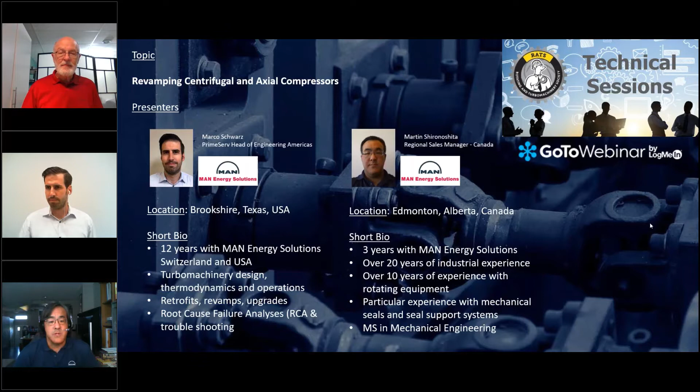As Ralph said, my name is Martin, don't worry about the last name. I am located in Edmonton, Alberta, and we are MAN Energy Solutions, formerly known as MAN Diesel and Turbo, formerly known as MAN Turbo, which is a name that I hear quite a lot from my contacts here.

So very quickly, the history and timeline that we have: MAN really goes back a lot in history, all the way back to 1758, which is when we formally consider our founding date. Then as time went through and mergers happened, we incorporated legacy brand names such as Borsig and GHH, which then became GHH Borsig.

On the other side, you see the Sulzer bracket, which was Escher Wyss, which then joined Sulzer. Sulzer joined with Brown Boveri, became BST. Then they separated part of that into the ABB stream, and Sulzer Turbo left with some of the turbines and compressors. Sulzer Turbo was basically joined with MAN around the early 2000s, and that became MAN Turbo at that time. Then through time it just changed to MAN Diesel and Turbo to incorporate the diesel engines division that we have.

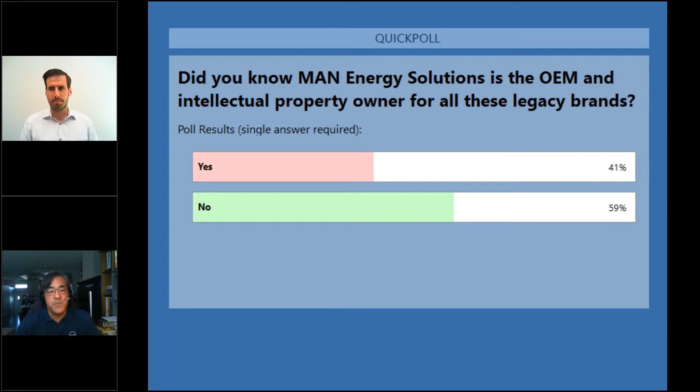It's good to know. So with that said, keep in mind again these brand names. Marco, if you could go to the next slide.

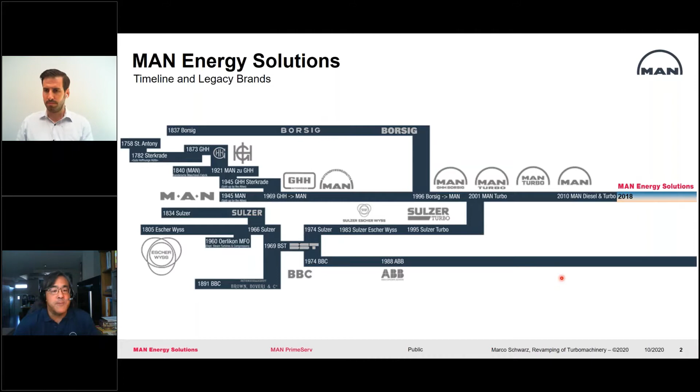Just so you can see between our turbomachinery, but also our marine engine division, which is the other big part of our organization. Now we have a fairly large global footprint and quite a bit of presence in Europe, Middle East, Asia. Here in the Americas, we are getting quite a bit of traction now with more localized support, as in the person of Marco, as a matter of fact. So just a quick snapshot of how wide our network is and our capabilities to properly support your turbomachinery needs.

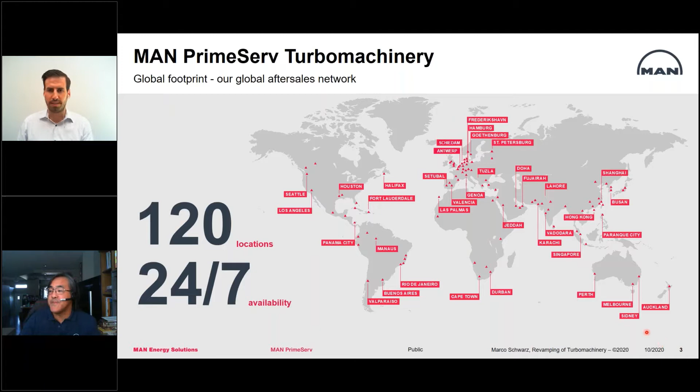I'd like to start with a simple question: why revamp turbomachinery? If your mics were open for this webinar, I would take your responses, but that's not the case for this setup. So just spend 3, 4, 5 seconds thinking about that question - why is it necessary to revamp turbomachinery?

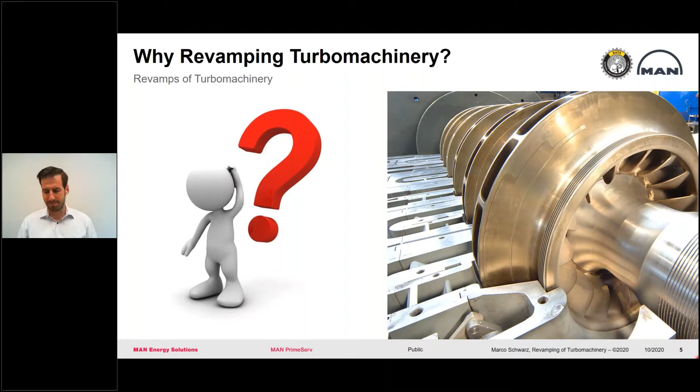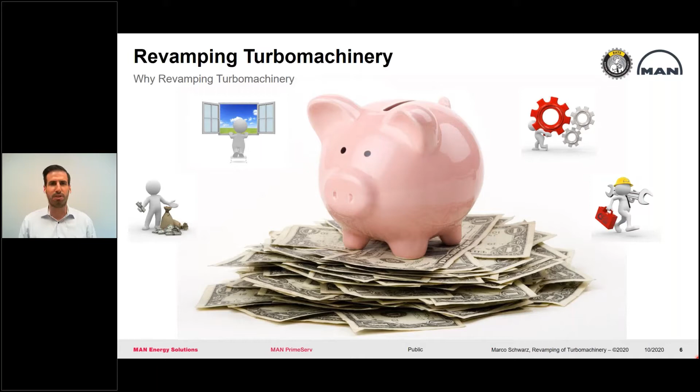This is the answer: it's about money. Well, that's the main answer. However, there are several other reasons why turbomachinery can and should be revamped, and I'll mention those in the following couple of slides.

First, I'd like to give a short introduction about background and reasons for revamping, as mentioned. Then we have the technical aspects about axial compressors and centrifugal compressors - what and how equipment can be revamped. Then we'll talk about MAN OMNICARE, which is our term for modification of equipment supplied by suppliers that are no longer in the market. And last but not least, we'll have time for discussion and your questions.

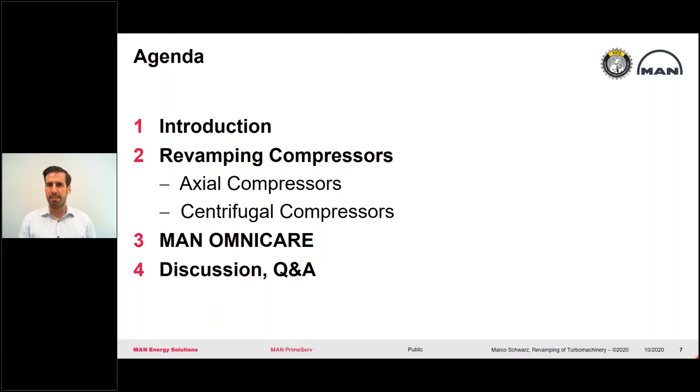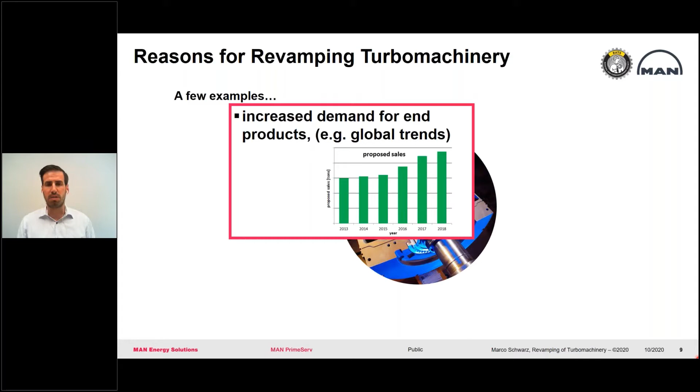Having said that, I'm going to start with the introduction about reasons for revamping turbomachinery. One of the main reasons is increased demand for the end product that any manufacturer provides - this can be refined products, plastics, air separation, whatever business we're talking about. There's often just an increased demand for the end product, which results in an increased demand and increased performance required from the turbomachinery equipment in the corresponding plant.

Another reason is efficiency improvement and emissions reduction, a topic that became more important over the last couple of years and will become even more important in the future.

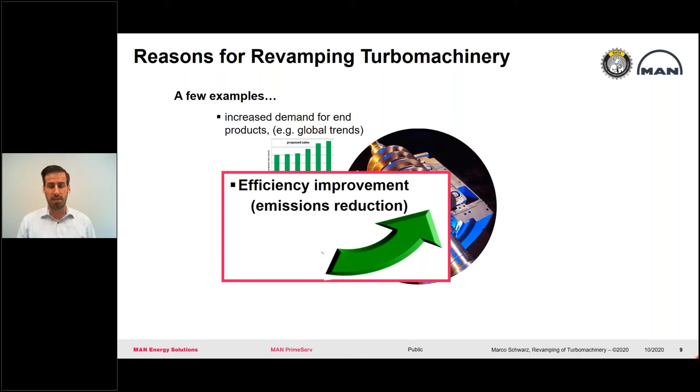Furthermore, we handle a lot of natural gases, and natural gases tend to change over the years. The composition of gases in a gas field somewhere around the globe doesn't stay the same throughout the whole existence of that gas field. So the gases change, and if the gas composition changes significantly, the turbomachinery equipment may not be capable of handling it anymore and needs to be adapted accordingly.

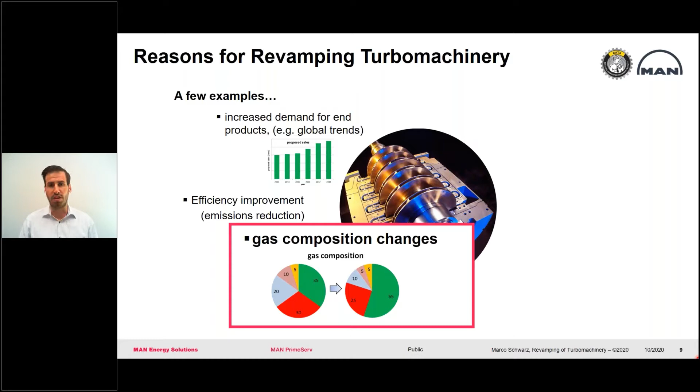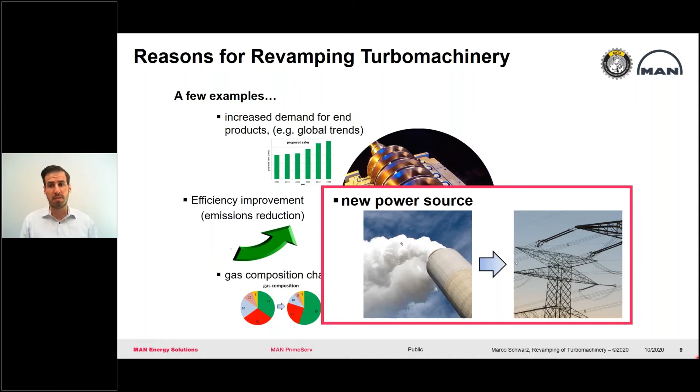New power sources are another reason. There are times when it makes sense to switch from a steam turbine to, for example, an electrical motor to drive the compressing equipment, or the other direction, or from gas turbines to electrical motors, or vice versa.

Adapted process demands - the overall process in a plant changes due to modernizations and adaptations, which then results in adaptations to the process conditions of the turbomachinery equipment.

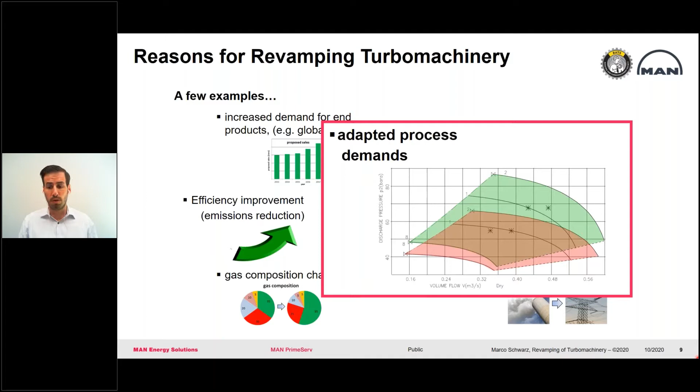And last but not least, gas field pressure decreases. As mentioned, much of the compressing equipment is installed in the oil and gas industry, and pressures in the fields drop over the years of production. That means the compressing equipment needs to be adapted accordingly - a higher pressure ratio is required, which can result in modification of the equipment as well.

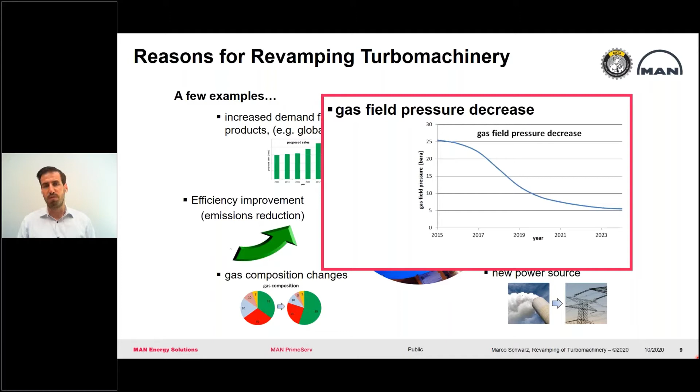What are the general benefits of revamping turbomachinery? First, as mentioned, one of the biggest drivers is usually financial savings and earnings - reliability, efficiency, and increased production eventually end up in dollar values. Besides that, the Green Deal, reduction of emissions, and energy savings are becoming more and more important throughout any industry where turbomachinery is installed.

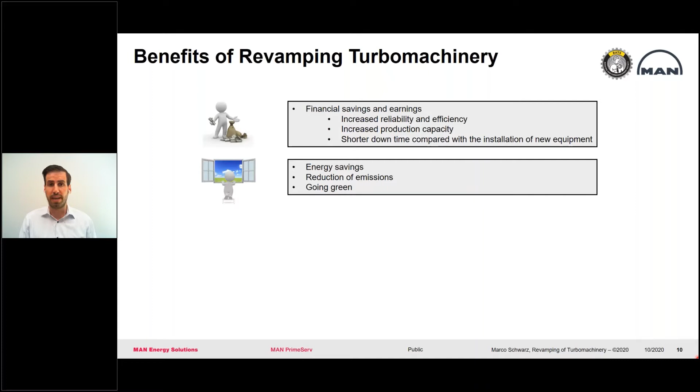Furthermore, there are technical reasons - optimization of production, safety, or adapting equipment to state-of-the-art design, or just minor changes to the equipment with reuse of the main existing components. We'll dive into that a little more later. Last but not least, there's the human factor, which shall not be neglected.

Operating personnel sometimes is used to equipment for decades. Consider the fact turbomachinery might operate for 50, 60, 70, or even 80 years in the same place, and certain procedures are established. It's not easy for on-site staff to adapt to completely new equipment with different behavior, which can result in unforeseen shutdowns and difficulties when equipment is completely replaced. It might be worth instead to replace parts of it and modify the existing equipment accordingly.

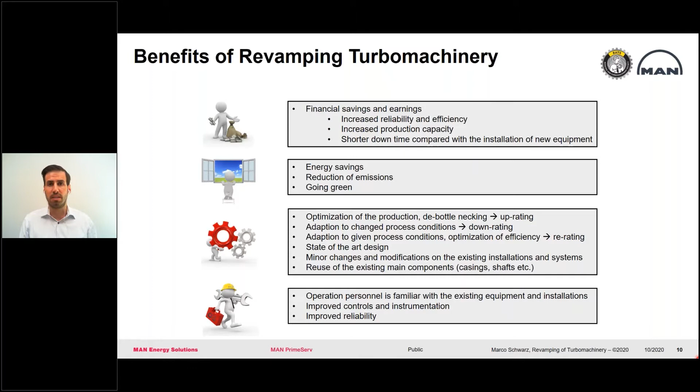Installation costs are way lower when the main components of the existing turbomachinery can be retained. Let's say the outer casing remains in place as is, so we have a very short shutdown: open the casing, remove the old parts, install the new parts, close it back again, ramp up, and you're back in operation. Instead, replacing the whole casing usually results in adaptation of the pipework, foundation needs to be reviewed, and certain things always come up during these replacements. So standstill and shutdown times are much longer, resulting in significantly higher costs.

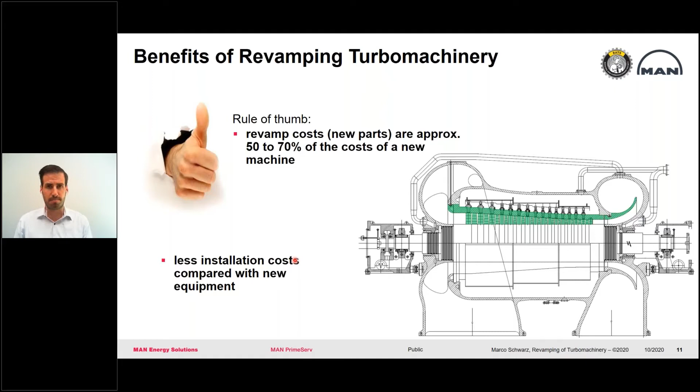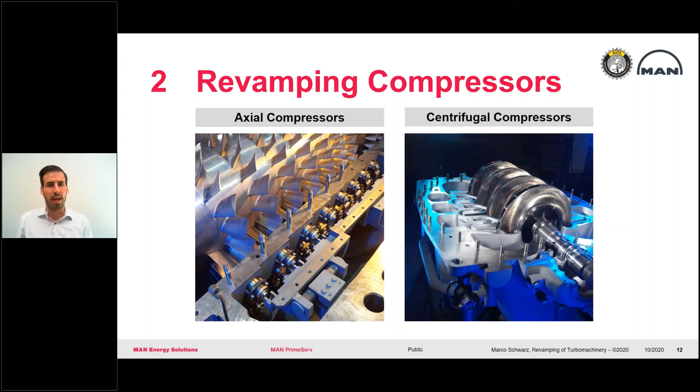Now we're going to dive into the technical part of that presentation. I'm going to start with the modification of axial compressors.

You saw a pretty similar sketch drawing of an axial compressor just a few slides earlier. This is the inlet nozzle, here the flange, and we're feeding through the inlet volute into a certain number of axial compressor stages, which usually consist of a rotating blade and a stationary vane. The medium, mainly air, is compressed, fed through the diffuser into the discharge volute, and then fed to the downstream pipework and the process. What we're going to look at specifically is the internal part of the axial compressor, call it the thermodynamic or aerodynamic part of the equipment.

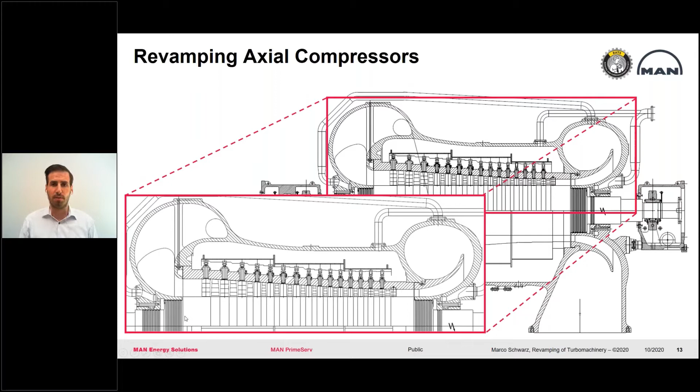Let's talk about modification of that existing compressor. The easiest thing to do is to change the rotating speed, lower it or increase it. The question is, what is the impact on the performance envelope when changing the speed?

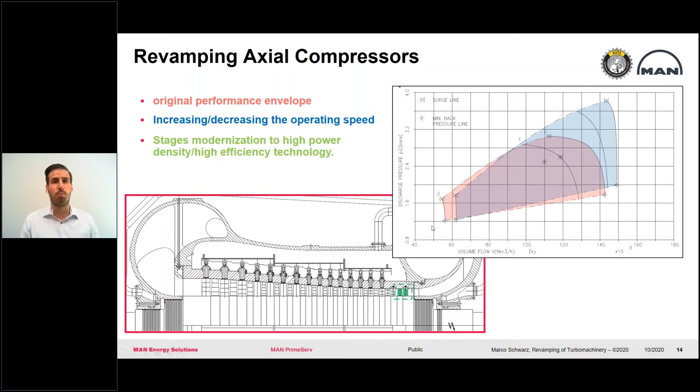Besides that, another common revamp option for axial compressors is to adapt the stages. That can be replacement of the stages by a different blade design or type, or in order to keep costs low, additional stages can be installed or just removed. So the question is, what happens if we add an additional stage, consisting of a rotating blade and a stationary vane, on that compressor? How does the performance envelope shift?

In this case, the envelope shifts upwards. Adding stages means we increase the pressure ratio, that means we lift the discharge pressure, that's the only thing we do. If we remove stages, of course, we lower the pressure ratio. So we can say we adapt the performance envelope, we move it vertically, but there's no horizontal movement to lower or higher flows.

A bigger revamp modification that can be done is to exchange the flow channel and the blading. Of course, that ends up in higher costs. However, it offers way more flexibility. As an example, it's possible to shift the map to higher flows or to lower flows if the unit is oversized, less flow is required, and we want to avoid recycling throughout continuous operation. Last but not least, of course, the combination of all of those options gives us the biggest flexibility, and we can gain quite a bit of an envelope and a range of modifications that can be applied to that existing equipment.

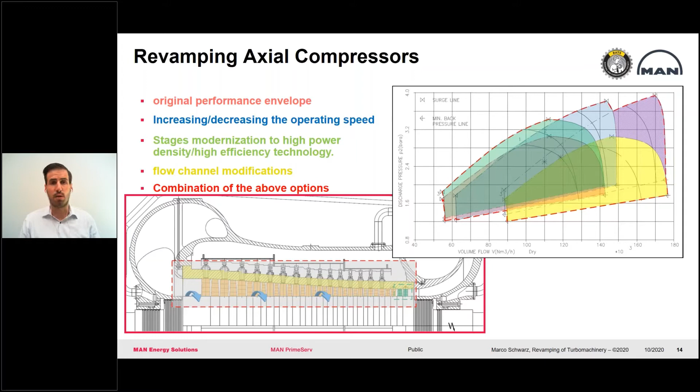Another revamp option that comes up pretty frequently is the replacement of hollow shaft design rotors by solid shaft design rotors. Back in the days, we're talking about the 60s, 70s, sometimes the 80s, many of the compressor shafts were made of a hollow shaft design. Reason for that was basically it was lighter, and material costs were much higher. Nowadays, I'm not aware of one single manufacturer for major equipment that still builds hollow shaft rotors like we did in the old days, and there are some reasons for that.

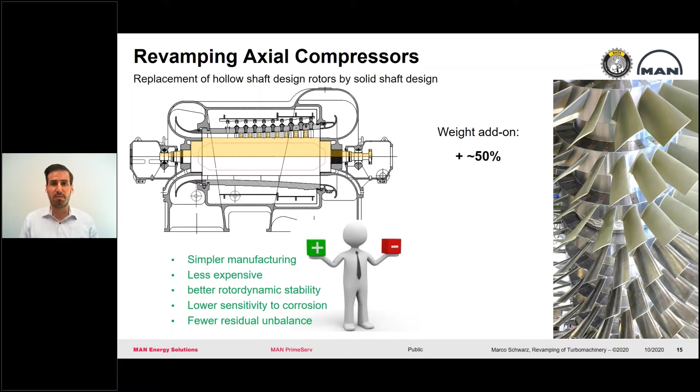The downside, of course, is we're going to add weight. We can consider about 50% of weight increase when talking about an axial compressor shaft. However, the pros are we have simpler manufacturing, and this is the main cost factor that makes it less expensive. We have much better rotor dynamic stability because the equipment is heavier, it runs more stable, and we have lower sensitivity to corrosion. That might sound special, however, if you consider the hollow shaft design, they're either welded or screwed, and there's always space and weak points where corrosion can start and be initiated. With the solid shaft design, these weak spots are basically gone and not present anymore.

At the downside, as mentioned, we build heavier. That means the existing equipment needs to be checked if they can handle that additional 50% of weight. Is there any impact? Do we have to exchange the bearings? Is there even bearing housing that needs to be exchanged? And of course, the transportation of the equipment to site. However, considering that the equipment might be running for 30-40 years, transportation is usually just a very small factor.

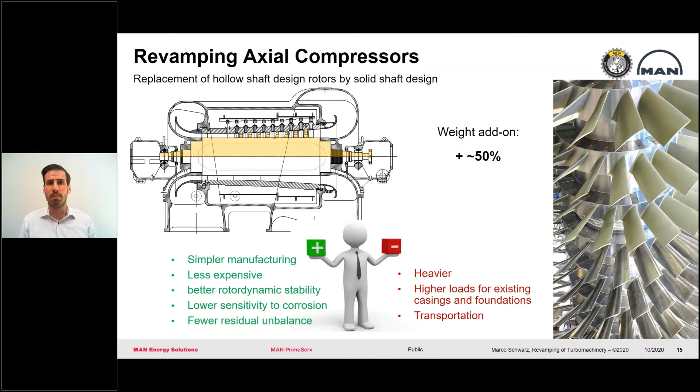Let me give you an example for a revamp of an axial compressor that MAN performed a couple of years back. The original equipment was installed in the 1990s. It's a refinery in the Middle East, and we're talking about an A45-11 compressor. A45-11 was the former Sulzer turbo code and actually means axial for axial compressor. 45 is the diameter of the shaft in centimeters, and 11 is the number of stages.

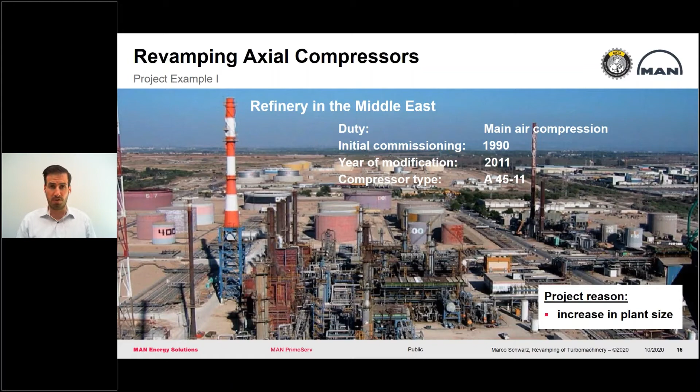The reason for that revamp was one of the most common aspects: increasing plant size, increasing production. Looking at the setup, we were talking about that A45-11 compressor, which was coupled with a flexible disc coupling and driven by a steam turbine. We were talking about a pressure ratio of about 3.5, from atmospheric to 3.5 bars absolute discharge pressure, about 90,000 norm cubic meter air, and we have a speed controller to handle and control that compressor, which is pretty normal for steam turbine driven equipment.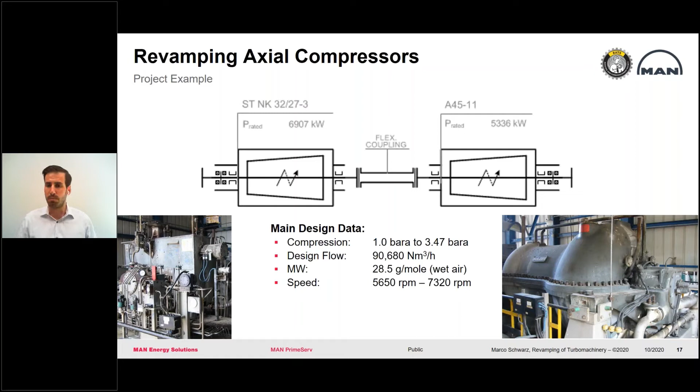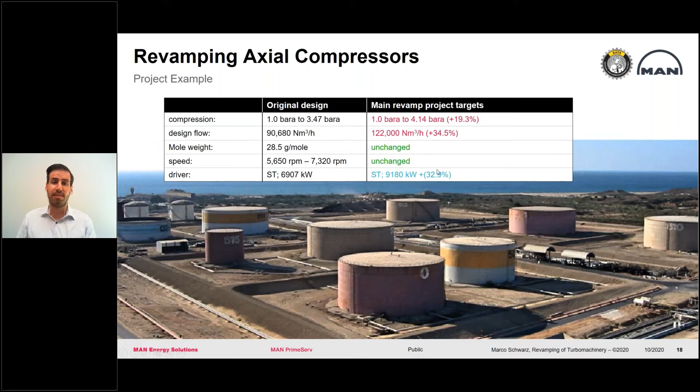Looking into the figures of that plant increase, that resulted first of all in an increased pressure ratio for the compressor. The plan was to increase the pressure ratio by 20% to go up to 4.2 bars absolute discharge pressure. The main factor was the flow increase - we're talking about a flow increase of 34.5%, which is a major increase for turbomachinery equipment. Eventually, that results in higher power consumption, and the turbine needs to be looked at as well.

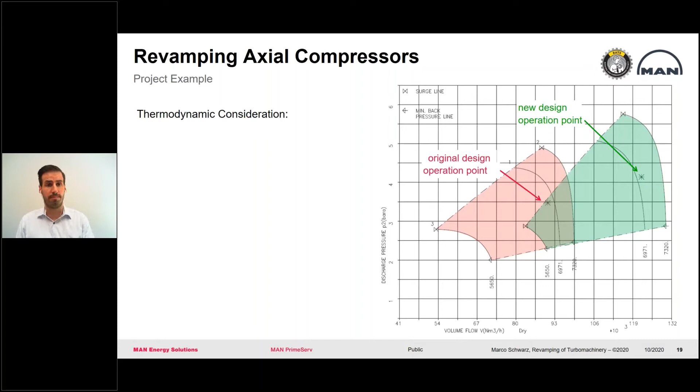Looking at the thermodynamics, this is the map, the original map as we saw before, with the original design operation point where the unit was running. The new design point had a higher pressure ratio and a higher flow up here. This was the new map after the revamp. How could this be done? It's a major change, and what was necessary to be exchanged on that existing compressor to meet that target? Here we see a cross-section of the original compressor and the revamped design.

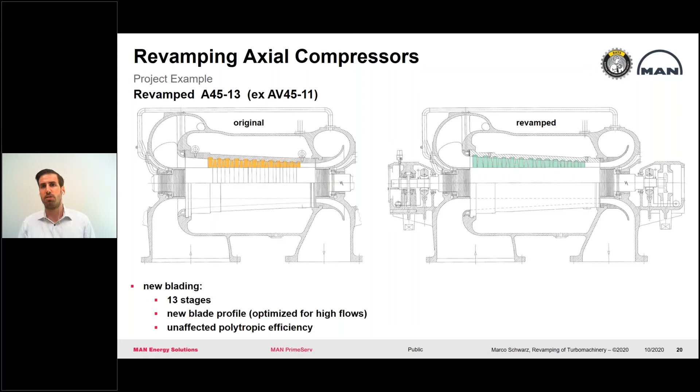In general, the flow channel needed to be increased. It was not possible to push this additional 35% through exactly the same flow channel - that would have resulted in too high speeds and gas velocities. Therefore, it was necessary to open the mouth of the flow channel and replace it with a larger design.

Last but not least, we needed about 32% additional power to do that compression, so the turbine had to be adapted as well. We had to replace the second stage, which was the throttling stage of that turbine, to be able to supply that power. In general, all the rest could be retained.

It was not necessary to touch the outer casing. The shaft could be reused, seals, bearings, coupling, unchanged oil system, and retained anti-surge and safety valves, which were sized from the initial installation for quite large sizes, which is usually not the standard, but can be the case every now and then. Considering the amount of modifications done for getting that much more out of that unit, it's quite impressive.

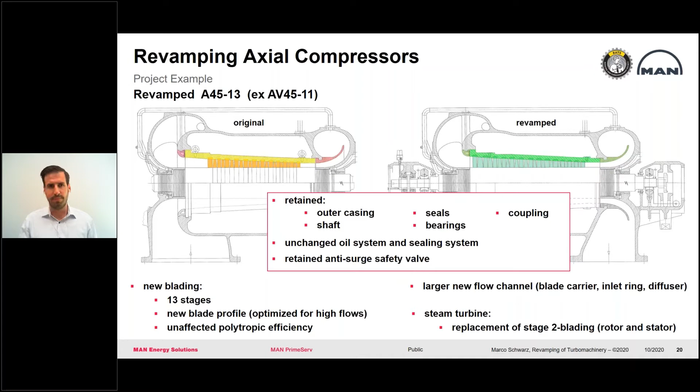Just another small example: a unit in South Korea in 2018 where the goal was to increase the efficiency of the equipment. By replacing all these inner parts you can see here, the greenish parts, it was possible to increase the efficiency by about 6.5 to 7.3%, which is a one-to-one power saving, resulting in 7.3% lower operation costs.

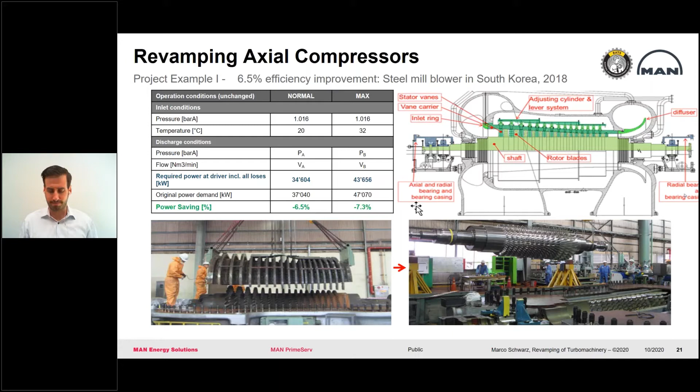Talking about centrifugals now, we're going to do exactly the same game as we did for axial compressors. We're looking at the internal part of a centrifugal or radial compressor.

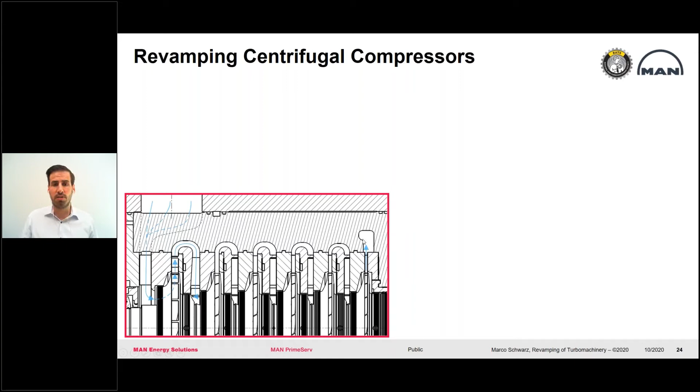For your explanation, this is the compressor inlet, the nozzle where we feed through the inlet guide vane into the first impeller, go through the first stage diffuser, return channel, second stage, second impeller, diffuser, return channel, in series through all the 6 impellers until we feed into the discharge volute, which can be seen here.

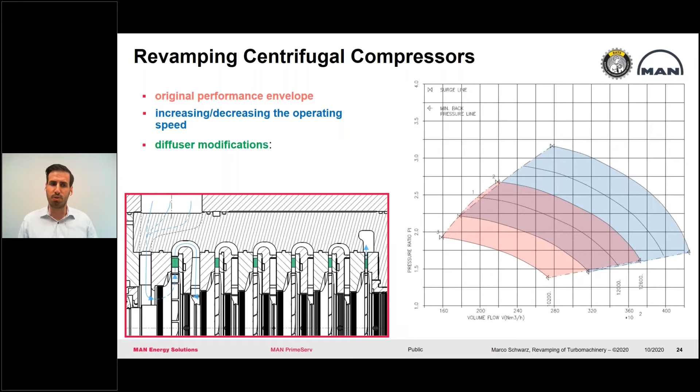The second option is basically diffuser modifications, and this is something that is not really possible for common axial compressors. For that, we look at the front eye of a compressor stage. What you see here is basically the impeller, and around here, this is the diffuser with the diffuser vanes.

In this case, they are adjustable to basically demonstrate the changes. Looking at this white area that is highlighted here, once again in green, these are simplified visualization of the impeller, of this diffuser vanes. In the regular setup, they result in that reddish envelope, the original envelope.

What happens if we remove them? If we remove the vanes completely, we just cut them out, we're going to end up in a so-called unvaned diffuser. Unvaned diffuser means that we're going to increase the flow path. We basically remove the vanes that limit the flow that can be handled through the diffuser, and therefore we increase the throughput by a certain amount, which can be quite a bit of an increase.

However, the flow is not as properly guided as if there were vanes installed, so therefore the efficiency drops. And a drop in efficiency means less pressure ratio. So long story short, removing the vanes means more flow, less pressure, less efficiency.

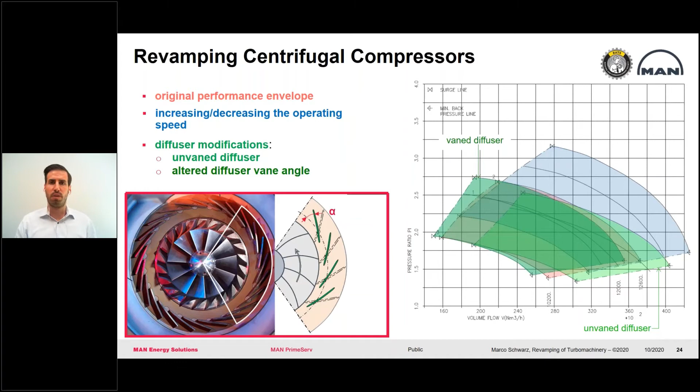On the other hand, what we can do is close the vanes or open them. For this example, we're going to alter the vanes and close them by a certain amount. If we close it, remember what I mentioned a couple minutes ago, we're going to close the flow path, make it smaller, and therefore limit the throughput through the diffuser. That results in a lower flow, and we actually shift the map towards the left side, throughout lower flows.

On the other hand, we do have gas flow very well guided, as basically the cross section through the vanes, or in between the vanes, becomes smaller. That means we have better guidance and we gain efficiency and therefore we gain pressure. So in this case, closing the vanes to a certain amount means less flow, higher efficiency, higher pressure.

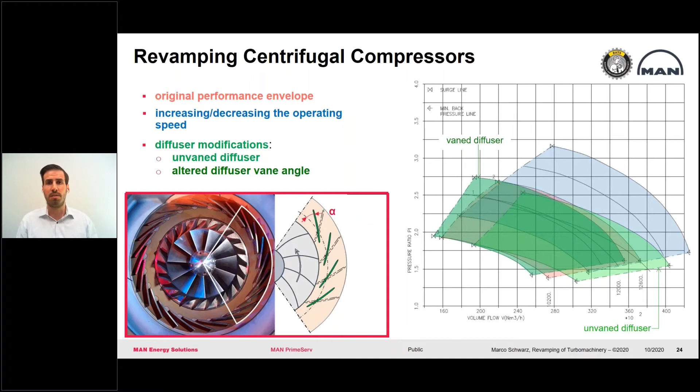Last but not least, of course, we can combine all those options and rebundle the whole compressor: remove rotor, remove internals. This gives us the full flexibility to basically move in any direction we want with the performance envelope.

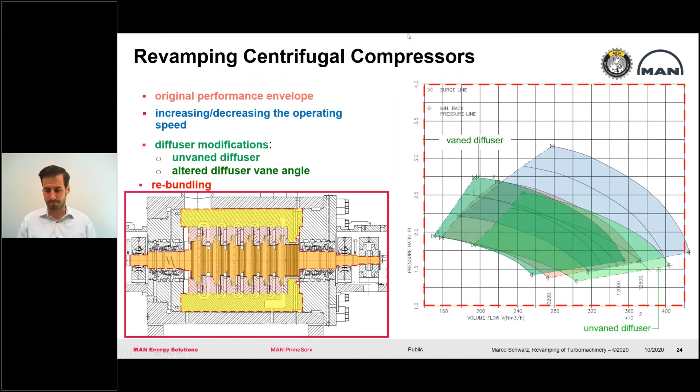Another example here, a platform in the Caspian Sea.

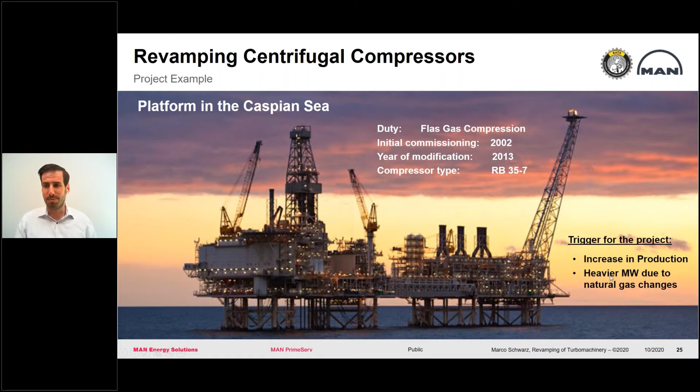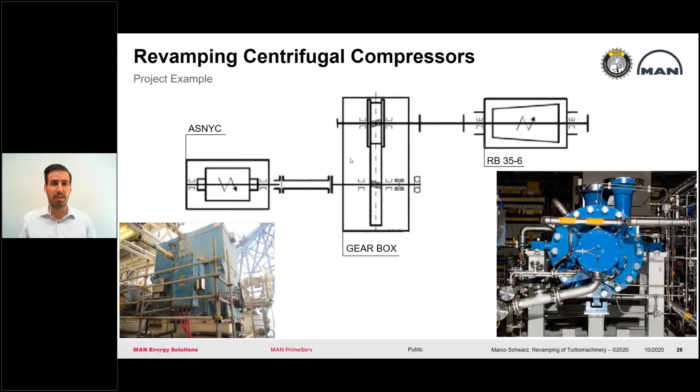Due to the service being flash gas compression, it was an RB35-7. That means a radial compressor of a barrel type, 35 centimeters medium diameter of the impellers, and 7 stages. There was demand for increased production, same as for the axial compressor, and the gas has slightly changed. Looking at the setup, we again have a compressor driven by a gearbox, and in this case, an asynchronous motor.

Looking at the conditions, the pressure ratio remained more or less the same, from 2.47 to 2.46 roundabout. That's considered the same. The flow has significantly increased by 50%, and the mole weight is a little heavier. As a result, the speed and the power demand from the driver has changed as well, but I'm going to mention that in a sec.

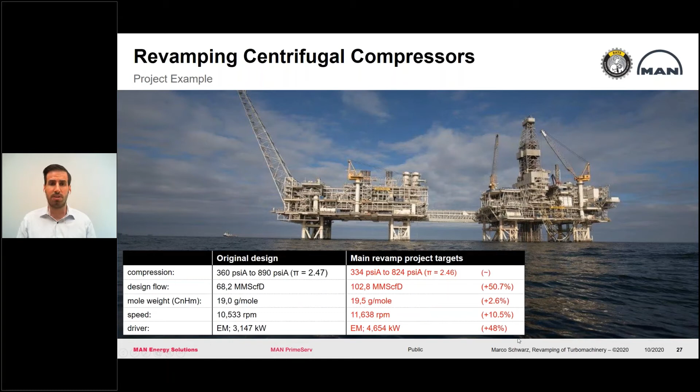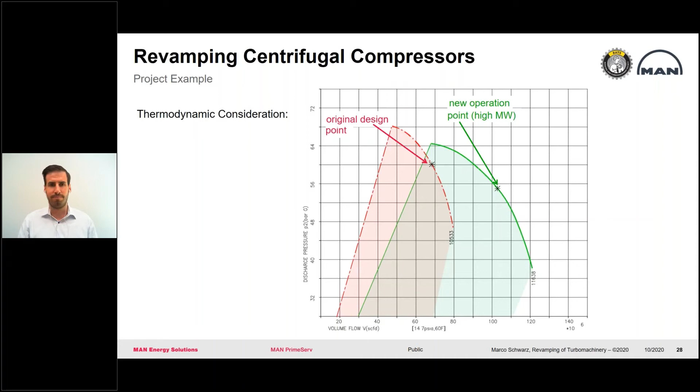As before, this is the original design point that moved over here to the right-hand side. Slightly lower discharge pressure. Remember, the pressure ratio remained the same, but the overall discharge pressure slightly dropped. Therefore, this is why you can see that vertical difference between the original design point and the new operation point. In this case, we basically added 50% of flow, of volume flow.

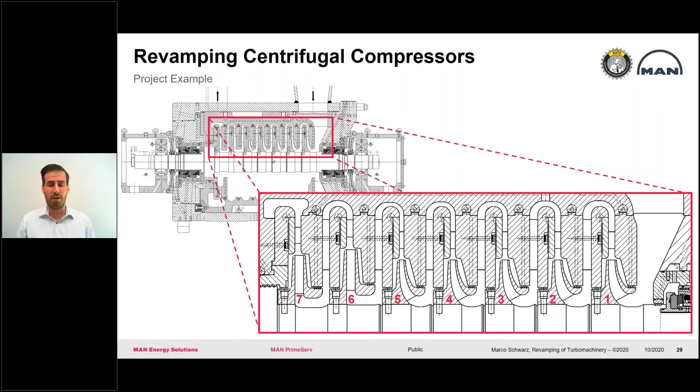So the problem that we faced here is the thermodynamic requirements of that revamp: we had an increased volume flow of 50%, which is major, but the pressure ratio remained unchanged. So having 50% more flow means actually wider impellers, and that would mean we need more axial space that would be required to install these wider impellers.

But we do have physical limitations. That means the outer casing is given. There is just not more space available on that offshore installation. We have to use what's available.

So we need wider impellers for the higher flow, but we need the same amount of stages, the same number of stages. So we're running into a dilemma. How can we overcome that? That is the big question.

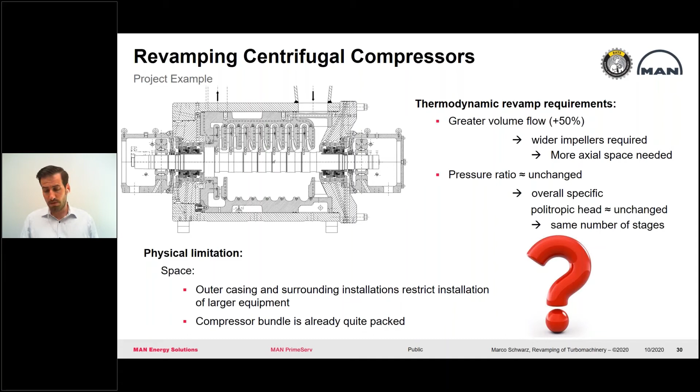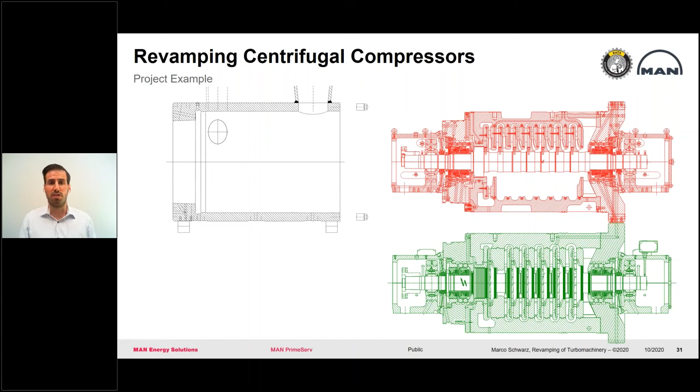The only solution for this revamp was to remove the whole bundle. So what you see here in red is basically the bundle that was pulled and needed to be replaced by a new, different bundle. Looking a little more into the details of these two bundles: first of all, we used to have a 7-stage bundle originally, and we ended up with a 6-stage bundle with 6 impellers only. How's that? We need the same pressure ratio.

So the 6 stages that were installed now are of a different type. They were actually wider in length, a little larger in diameter, so it was really maxed out to fit into that existing casing to get to the very same pressure ratio with fewer stages, but wider diameters.

And we're talking here about 10, 15, 20 millimeters of wider impeller diameter, multiplied by 6 stages, which is quite a bit of an impact. So it multiplies that little wider diameter for all the stages, resulting in the same pressure ratio.

Besides that, that was not enough. We had to replace the gearbox. The pressure ratio and the higher flow required a higher speed, so the speed was increased by approximately 10% with a new gear wheel set. The casing of the gearbox could be retained; it was just a new gear wheel set.

And another major modification that was required: the motor. The driver, the electrical motor, needed to be replaced by a new electrical asynchronous motor with a higher power rating of an additional 20% power. The old one could not be operated accordingly.

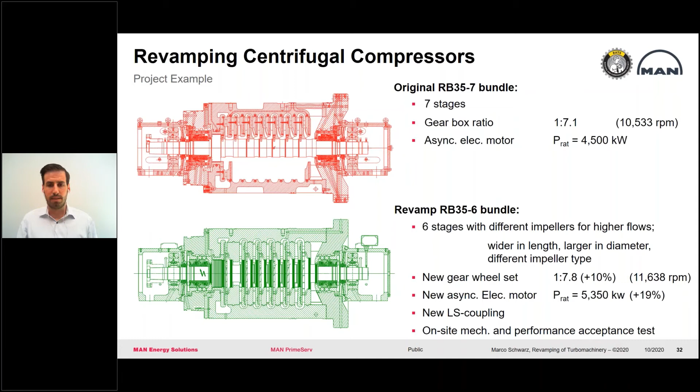To eventually guarantee and ensure that the process targets and the revamp targets were met, a mechanical running test was performed on site. That means the equipment was shipped on site, and according to API, an on-site test was done. That means a 4-hour running test with vibrations measured every 30 minutes according to a specific procedure. They needed to be recorded, and vibration and temperatures are not allowed to exceed a certain value. Otherwise, the test is failed and the compressor would need to be made good again.

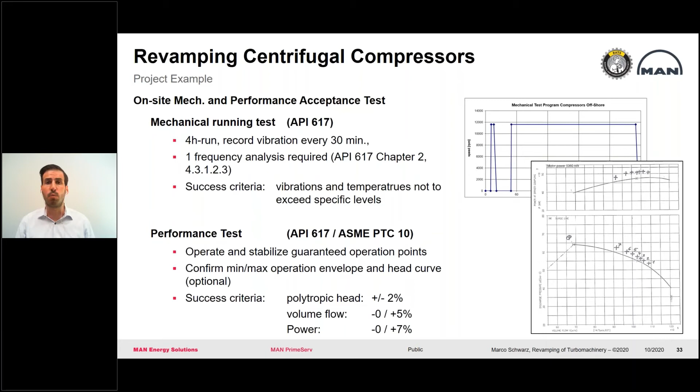Same applies for the performance. So the performance was actually measured on site and verified if the guaranteed conditions were met within certain polytropic and volume flow and power limitations that are actually given by API and ASME PTC10, which are the test nomenclatures.

I talked a lot about major modifications now. It does not always have to be a major modification done on turbomachinery equipment. Sometimes even small improvements can help a lot and can help save money, energy, or lower emissions. We're just talking about lube oil quality monitoring can help a lot, improvement of lube oil quality, upgrading seals from one seal type to another, or control system upgrades. These are all smaller modifications that can be done, but can help save a lot.

So each modification is basically very tailor-made to the needs and the existing boundary conditions on site. So whenever you feel or see there is a need, or there could be an opportunity to save costs, it might be worth looking into it.

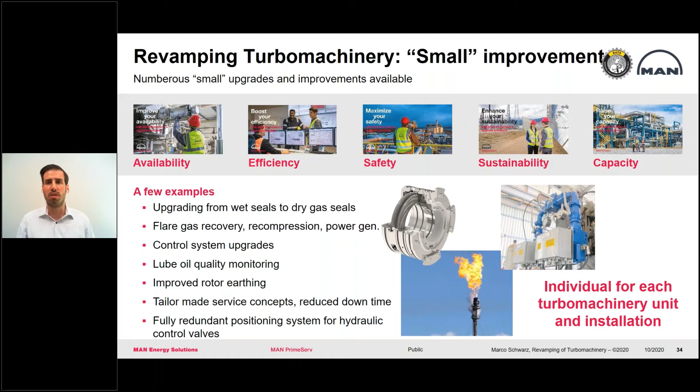Let's just spend a few minutes on OMNICARE.

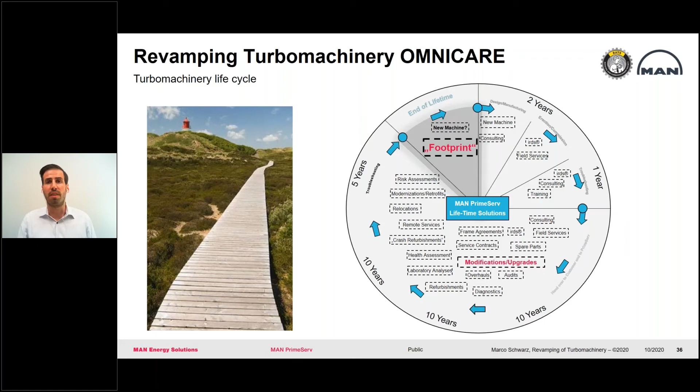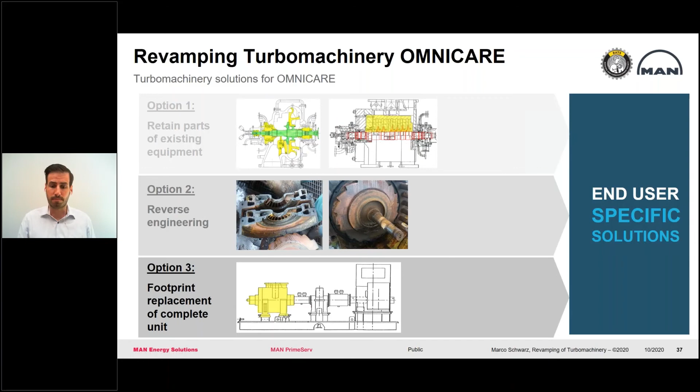Compressors at one time approach the end of their lifetime, which can be 30, 40, 50, 60, 70 years. We even have equipment that ran for 90 years in Canada. But at one point it's time to think about what to do with that equipment when it comes to replacement. Option one is retaining parts and replacing certain internals of the existing equipment. The second option is reverse engineering - taking the old installed equipment, copying it, and putting it back into operation. Usually not the best solution, it's quite expensive and doesn't provide additional advantages, and we don't get state-of-the-art design. So at one point, even a footprint replacement of the whole compressor can become a valuable option worth looking into.

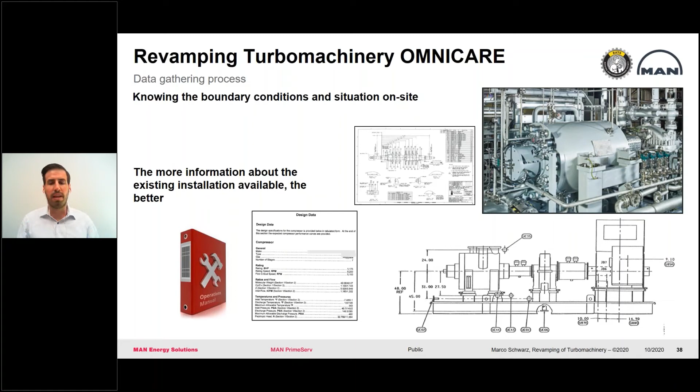We basically start from the top and dive deeper into the details. First, it's important to have as much information about the equipment as possible, from manuals to site visits, to know the boundary conditions, the nozzle setup, and the center line height of the equipment. All this needs to be considered, and then we come up with a plan and solution for how this can be replaced. The process is usually exactly the same regardless if it's equipment from Sulzer, MAN, GHH, or any other manufacturer in the world.

In the beginning, data needs to be gathered. We know the boundary conditions from the site, and where the compressor wants to go - maybe the conditions remain the same. That's already enough information. With this input, there's usually a feasibility check done - compressor selection and layout - just at a high level, to get a rough figure for that revamp.

Marco, it's 1:45. Yes, sir. Thanks for that.

With those preliminary investigations, it usually comes to a budget price - what would that end up with? If that project is still considered economically beneficial, there's usually a more in-depth engineering study done, which ends up in a firm proposal, a confirmed layout, guaranteed operation conditions, and a proposal that's ready to go into final negotiations.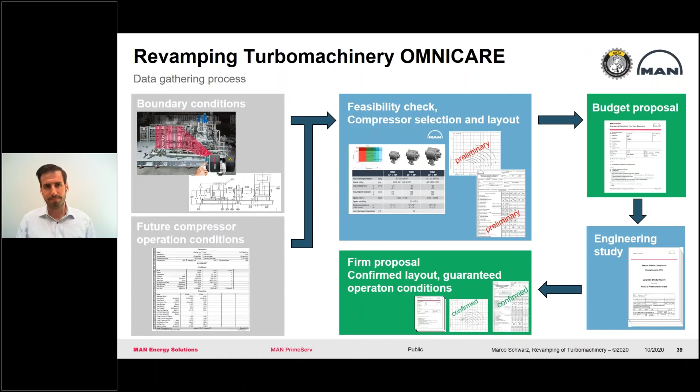Just a small example about such a footprint replacement done a couple of years back in the Apache Forties field, a field in the North Sea near England. We're talking about 6 old compressors from a different manufacturer, originally from the 90s. The problem with this equipment was very deteriorated performance over the years of operation due to corrosion and dirty service they had to do on site. From that original OEM, there was only very poor service available to service this equipment.

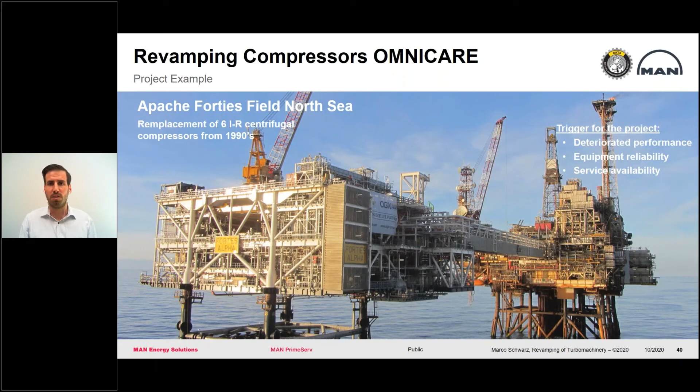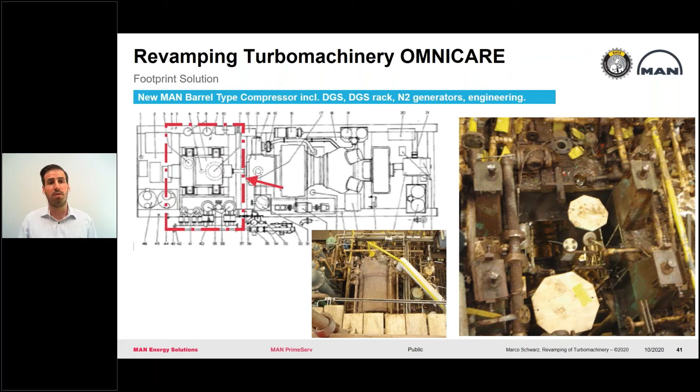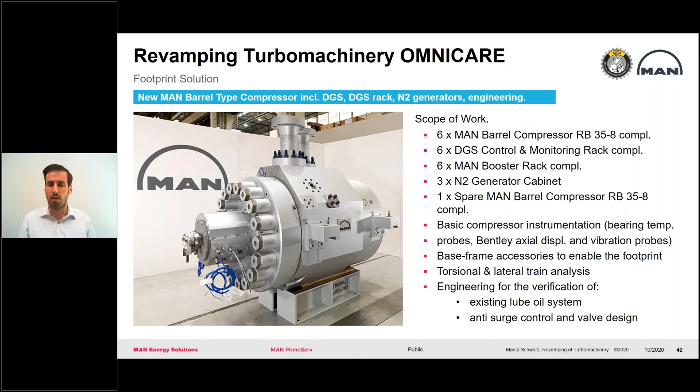I don't have too many good pictures of that revamp, but it's worth mentioning. What you see here on the right-hand side is the footprint - the 4 pedestals at the corner of the unit, and the 2 flanges, inlet and discharge, that had to be matched with the new compressor equipment. The solution was installing 6 barrel compressors, RB35 type with 8 stages, including 6 individual dry seal racks, booster racks, N2 generators, and the common equipment that comes with such a major change on a platform. It was basically throwing out the old equipment and installing new, with a certain shutdown required. All 6 compressors took over service and have been running well for about 8 years now.

That brings me to the end of my presentation about revamping turbomachinery and compressors. I hope I could give you insight starting with thermodynamics, which gives the boundary conditions for the mechanical design - usually very limited because of the given boundaries from site - and eventually all the different systems that need to be looked at when going into such a revamp process. I hope you enjoyed the session. Thank you for your time. Whenever you have questions or ideas, do not hesitate to contact us - we're here to help and happy to look into possible modifications of your equipment.

Thank you. Now we have time for Q&A, whatever you've got on your heart - raise your questions please. Thank you Marco, that was a good presentation. A lot of different scenarios, and seeing the compressor map was really interesting too, to see what changes affected the performance and in what ways. We have a list of questions here that I'll go through.

Nurud Chowdhury asks what are the limitations for revamping axial compressors. He was just asking about the limitations about revamping axial compressors.

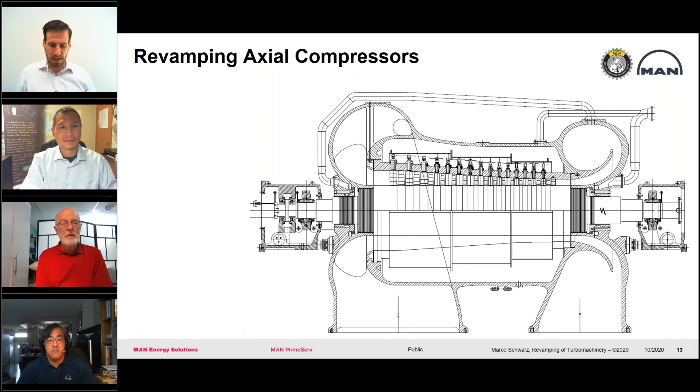This is the cross section of the axial compressor. There are several different boundary conditions we have to look at, as was pointed out with the nozzles. On one hand, we have the thermodynamic and aerodynamic limitations.

Within the nozzles or within the whole compressor channel, we cannot exceed a certain gas velocity. Long story short, regular axial compressing equipment runs below the velocity of sound, which is roughly 330 meters per second. When approaching that velocity, we hit a wall and the gas itself starts to block the flow path, creating turbulence, losing efficiency, and heating up without pushing more flow through.

So there is a thermodynamic limitation regarding velocities. Another thermodynamic boundary condition is temperature. Compressing gases results in the Joule-Thomson effect, which causes high temperatures. I wish we could compress up to 500 degrees C, but unfortunately we'd have issues with material specialists when heating the equipment up that far. So temperature is always a limitation.

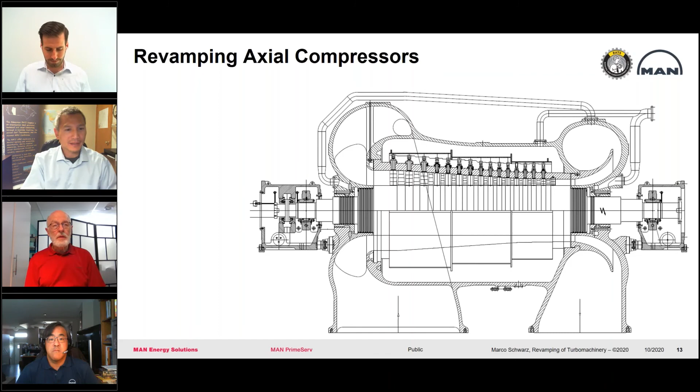Thank you. Okay, there's another one here: in an AV45-11 revamp, was the replaced impeller length the same as that of the original impeller, and if yes, how can the casing... I'm not quite sure what he's saying here.

Well, it went from 11 impellers to 13 impellers. This is the example - it's actually a very good question. As you can see here in the original design, there was a lot of space left, but only 11 stages were installed back in 1990 when that compressor was originally installed.

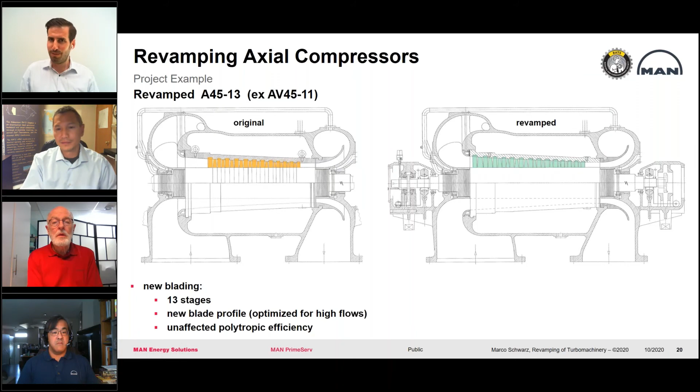The reason for that is that the casing in 1990 was of a cast design, and back in the days there were standard casing models used for casting the outer casing. In this case, the owner of that equipment was actually fortunate that back then they had to use a larger, longer casing, which is heavier and a bit more expensive, but provides much more room for modifications in future. If the original compressor had been an AV45-10, it would have been possible to go for the shorter casing with the same diameter, but the distance between the nozzles would have been shorter.

So it would have been a little cheaper, but it wouldn't have given the opportunity to do such a revamp. In this case, fortunately, there was plenty of space available within the casing. With the 13-stage design, there's even space for adding one up to maximum two additional stages. But it can as well come out the other way around. When it fits in a smaller casing, there might be limited options to boost the flow and pressure ratio that much as it was possible in this case.

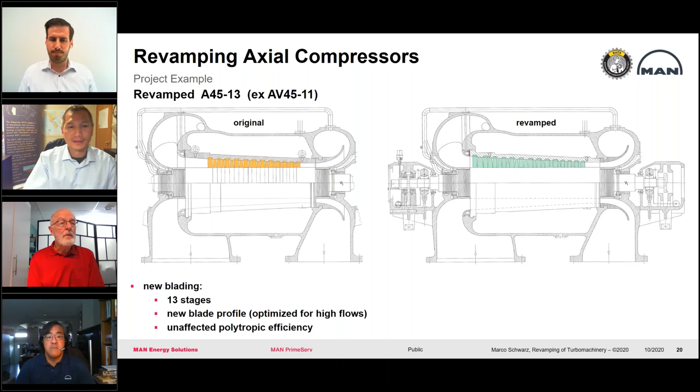And we want our equipment to run for years without being opened, without being shut down. So it's basically a question of availability. And last but not least, in most cases, barrel compressors are either driven by a turbine, which is speed controlled, and there's no benefit of IGV over speed control, or by motor with VFD, or they run so steady that it doesn't really pay off to install IGVs, and just a suction throttling valve is installed.